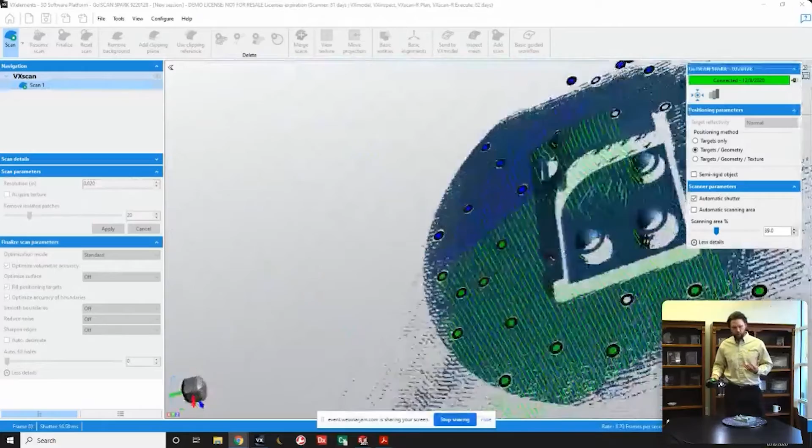This scanner will capture geometry as well as color. So if you have artwork and things like that you'd like to recreate in three-dimensional space with color, this is a great option. You set the scanner down. But again, this GoScan Spark is accurate to 50 microns, about 0.002 inch, one of the fastest 3D scanners on the market.

So I've captured the part as well as the table. Now I do want a little bit of the table left, so there we go. We're going to do an inverse selection. Again, this is VX Elements, Creaform's software. Extraneous pieces floating around won't actually be exported due to this remove isolated patch setting I've got. So it looks like we're good to go. That's a pretty decent amount of scan data there. So let's do a file export of the mesh.

All right, and that's the whole scan process. So if you had a second half of the part, you'd flip it over, click Add Scan, scan the other half, and merge them together. This one, we don't have to do that because the part's got a flat bottom. I'm just going to use the turntable. And from here on out, I'm going to be working in SolidWorks.

So this is where GeoMagic for SolidWorks comes in. To start a file, you would start just like a regular SolidWorks file, starting a new part. It's going to open up the part tools just like you'd normally use. Now, GeoMagic for SolidWorks is this tab on the very end, so it's an actual plugin within your main tool set. What's awesome about this software is that you can use the GeoMagic for SolidWorks tool set to extract features, then edit those features, and everything's going to be parametric. So anything it does is going to reproduce over here in your tree in a way that you can edit it.

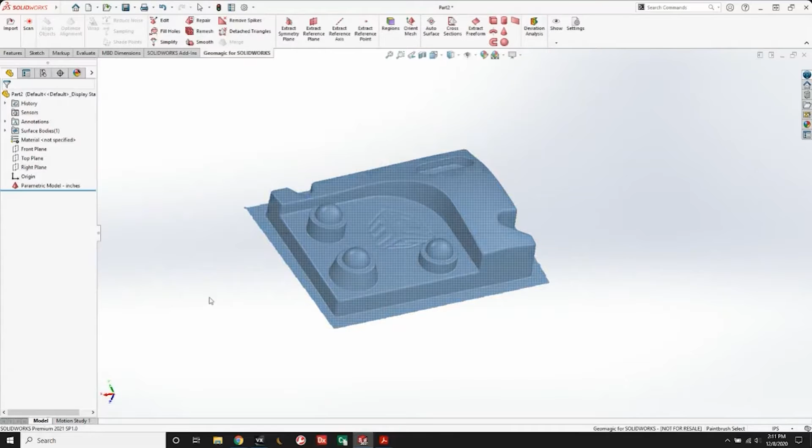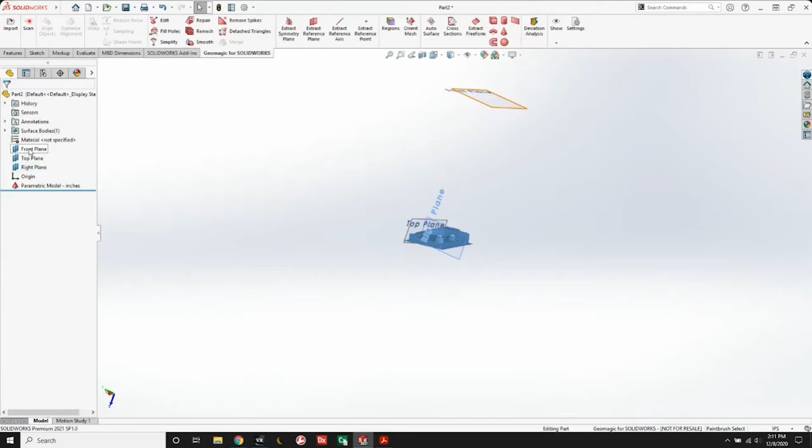So if we look at this part and look at our orientation planes, this is pretty common - the part's not oriented to our coordinate system. That's the first big step, the big problem this software solves. So I'm going to go ahead and use the software to align the scan to our coordinate system, get it a little more where it needs to be. Let's hide those planes. If you ever get a file from somebody that's been reverse engineered and it's not aligned to the coordinate system, this is generally the problem - they really don't have a way to do so. They just kind of import the scan and try to build features around it where it exists. That is not what we're going to do.

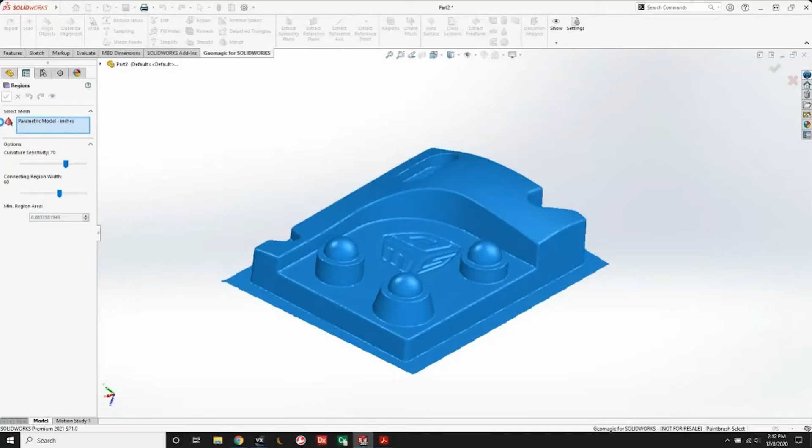We're going to go ahead and align this part. The first step is to divide the mesh up into regions. This is a feature from GeoMagic Design X. Regions are basically areas on the mesh that the software recognizes as individual features, so we can then pull those features from the mesh.

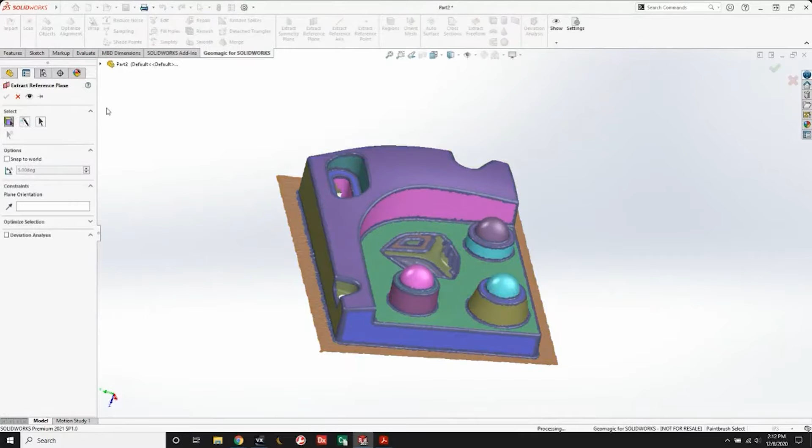The first thing I need is some reference geometry to get the scan to the coordinate system, and I can do that in GeoMagic for SolidWorks with these features. I've got extract feature plane, or reference plane. I'm going to click on that, click on my base feature, and I want the part aligned to that base, so I'll click the checkbox. I also want it aligned on this corner here.

I need a couple more planes. We're going to do extract reference plane again, click on that face. Then extract one more reference plane, and click on that face.

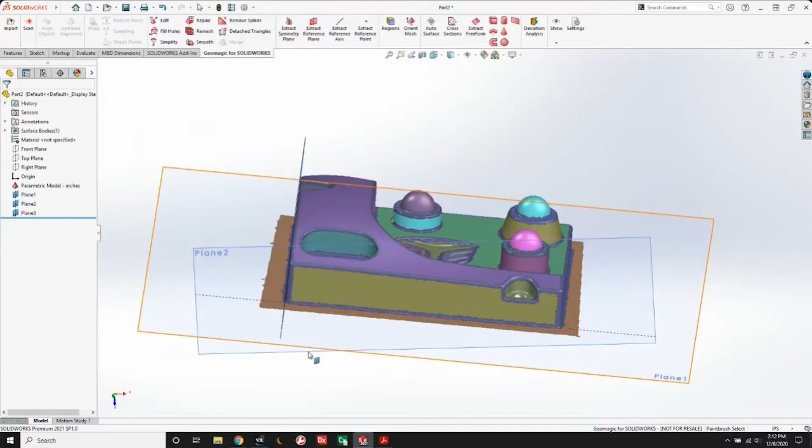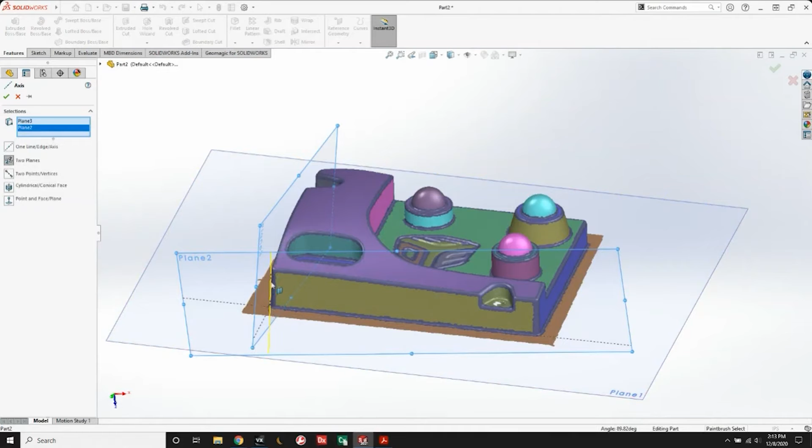Now to get my axis and point for a 3-2-1 alignment, I can go right into my SolidWorks features, so I can seamlessly jump back and forth because these are now features in my model tree. I'm going to go to reference geometry, axis, and choose intersect from two planes. We'll choose a plane here and a plane here, and that's going to give me my axis.

Then I'm going to choose a point because I want to choose where my origin is going to be, and it's going to be at the intersection of that axis and that plane. So there's my origin point.

Now I need one more axis going down the side of this part. I like to use the long edge. So I'm going to do one more axis, again intersect two planes, click plane 2 and plane 1, and there we are.

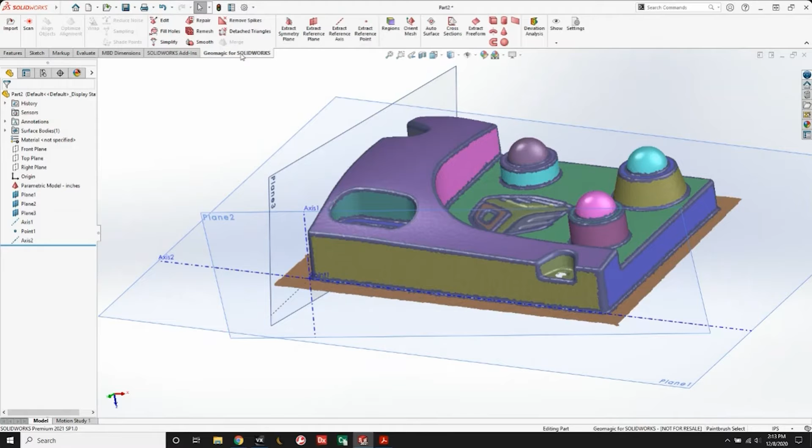I'm going to go back to the Geomagic for SOLIDWORKS tab, and we have the Orient Mesh button here. We're going to click on this, and it asks us a few questions. First, select the mesh. We only have one, so it's already there.

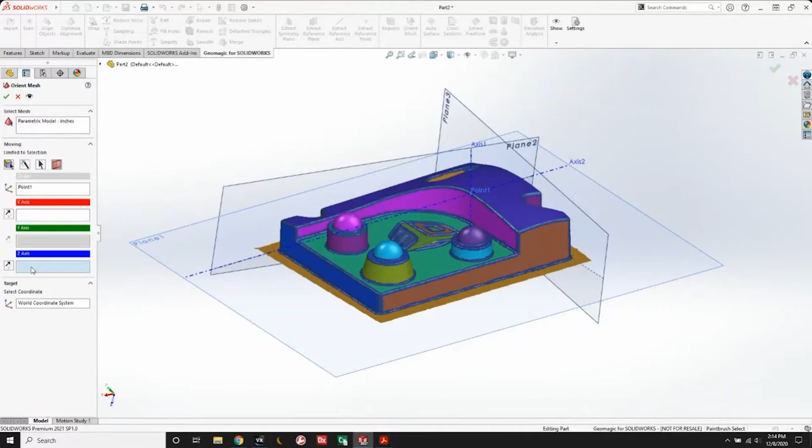Now we can pick where's the origin. I want the origin to be on point 1, okay? And now, with SolidWorks, the general isometric view is I kind of want it to look like this, where usually the Y goes up, the X runs in this direction, and the X runs in this direction. So what I can choose is Z-axis, then click on this vector.

That should snap the Z-axis that direction. Then for Y-axis, I'm going to click on plane 1, and that should get me how I want to go. My Y-axis is pointing down though, I don't want that, so I can just flip it, and there we go. Now I've got my coordinate system lined up how I want.

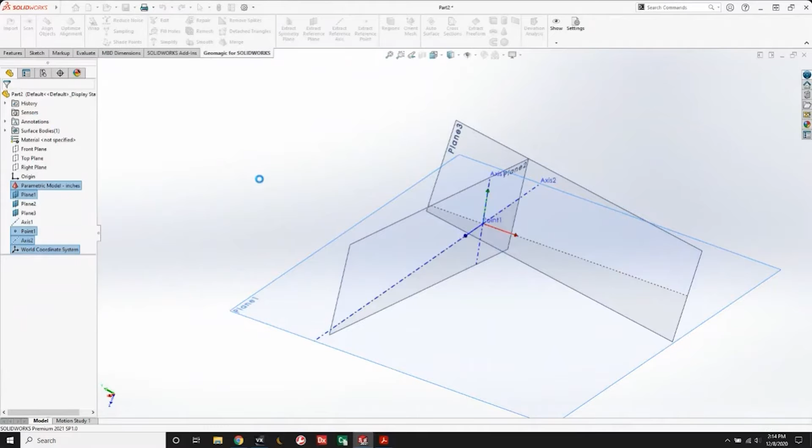So again, first big step is done. There we go. If I show my front, top, and right planes, you can see there I've correctly oriented my coordinate system, so that's what we want to see. The rest of these features are actually no good to us anymore, they're out in space, so we can select everything and delete it.

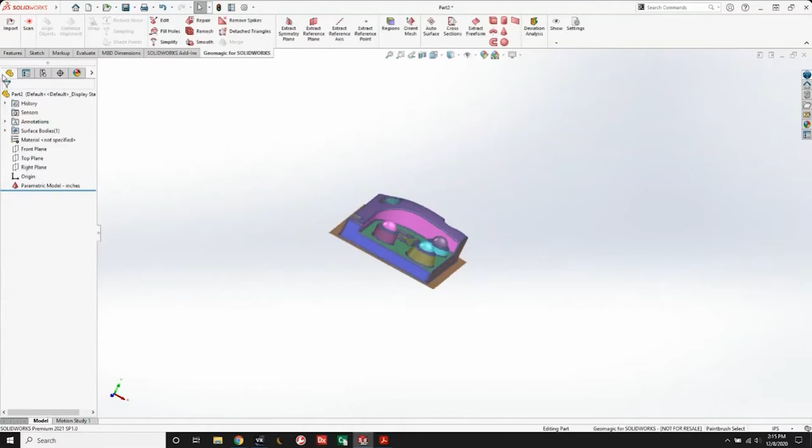So, all right, but we've got our coordinate system, we got our part aligned to our coordinate system. Now we want to start extracting our features, and this is where the tools get really cool. So if I want to make a solid part out of this, we've got a few extraction tools over here, and the first one is extract extrude.

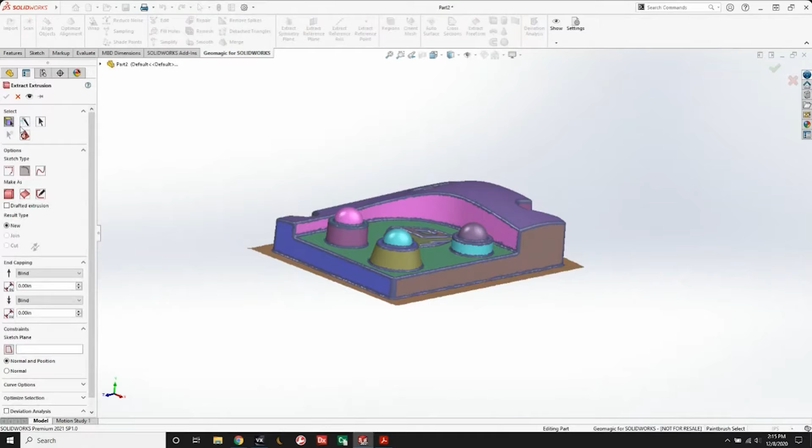If I click that, it's going to ask me a few different things. One, how do you want to extract it? I want to do it from the regions, and what I'll do is click the sides of my region, the side regions of my part. You can see it's already trying to create a preview.

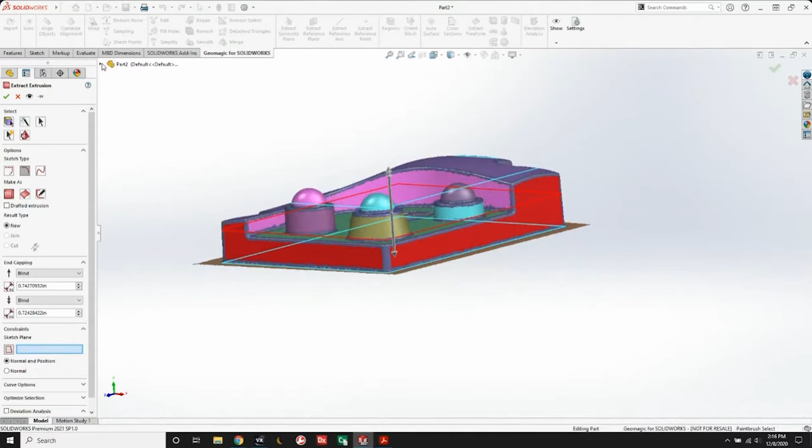So what it's going to do is analyze those regions, make a sketch, make a preview sketch, and then make a preview extrude. What I like to do is go ahead and constrain my sketch plane, so I'm going to make sure that my sketch plane is coming from that top plane. There we go, and let's see what else we got here.

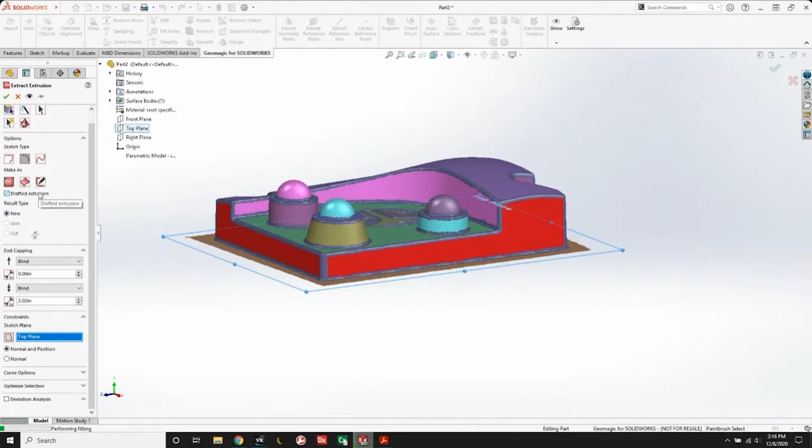I think that should be all the things I need. The other is the other end. I want to make sure it's dragged up above the part. We've got a few other options here that we can mess around with, but we're just going to leave it. I'm also going to check drafted extrusion because I want to make sure, whether it's drafted or not, this is going to find that out.

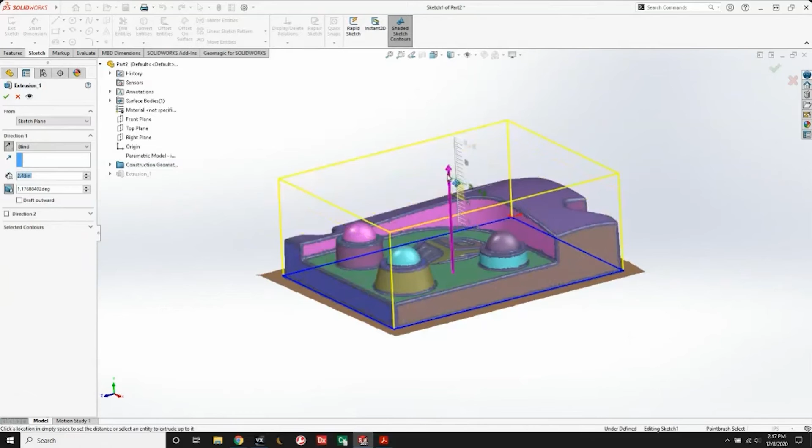So when I click my checkbox, it's going to create that sketch and create a solid body. Okay, so there's my extrude. Now what's awesome is you can see extrusion 1. If I drop this down, there's sketch 1. So it's created a sketch and an extrusion that I can fully edit in this software. If I need to go in and change how high I need to drag that extrusion, I can.

So it came up with an auto draft angle at 1.17. Maybe I want to just go ahead and make that 1, make it a 1 degree angle draft. There we go. And now we're ready to move on.

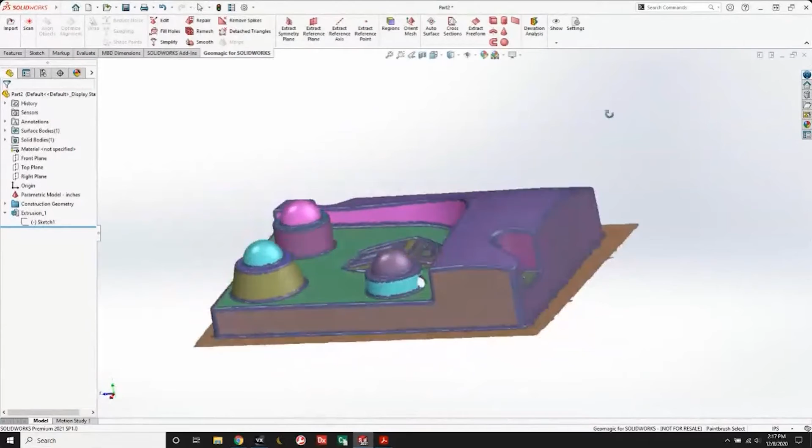So to cut the part down, I'm going to hide the solid body itself. And now I need to get the part cut back to this top surface. This surface here is an extremely hard surface to reverse engineer. There's no real good way to do it, there's nothing to measure from. It's just this weird, weird free form. So trying to make an accurate representation of that, there's no way to really do it if you were trying to do this on your own.

But this software lets us do it almost instantaneously. So we can say extract freeform. Same thing, it's going to ask us what regions to use. I'm going to click on that top region. All right, and we've got a few sliders here. I'm just going to leave them as default for now, and then we're going to click detailed preview.

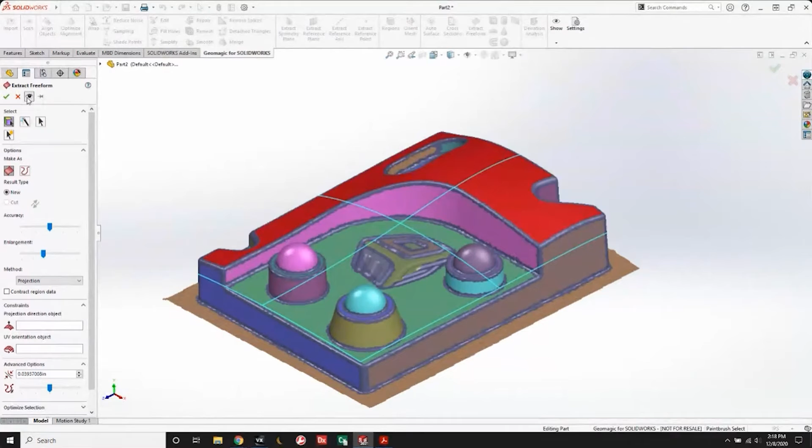So if I look at it, I can kind of see it's not totally fitting. And I also have at the very bottom this deviation analysis tool, and this is really nice. So I can choose how close I want to measure that previewed surface to my scan. I'm going to make it 5 thousandths. That seems like a pretty reasonable number. And you can see it's not perfect, there's some blue and some red, which means there's some high and low points.

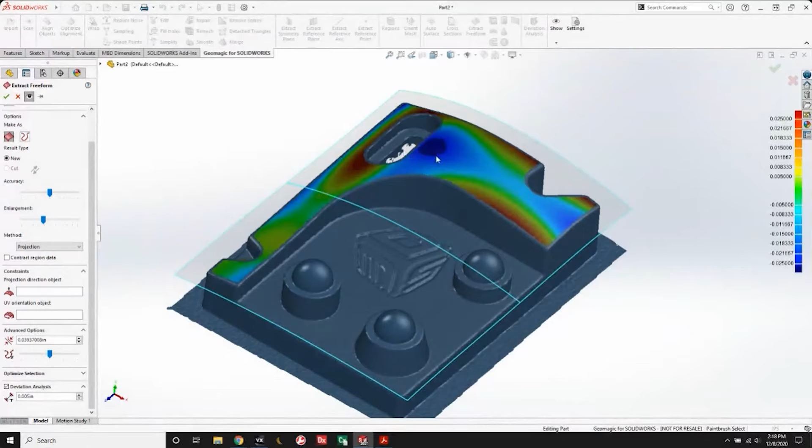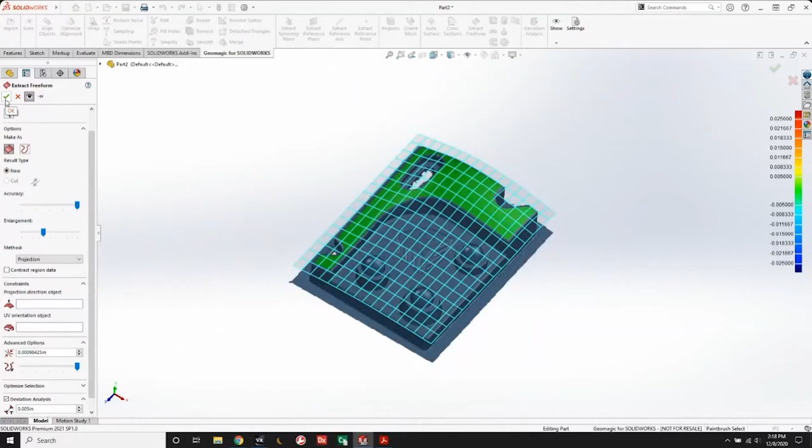So if I drag my accuracy slider bar, if it requires it to be higher, we'll let it regenerate that surface. And I can already tell that looks a lot better, and you can see it's totally green. So I'm within 5 thousandths of an inch all the way across that surface. The other slider is enlargement, I don't have to touch it. It basically just needs the surface to be outside of the boundaries of the part so we can cut the solid. So I'm going to click my checkbox, and that's going to make a really nice surface for us.

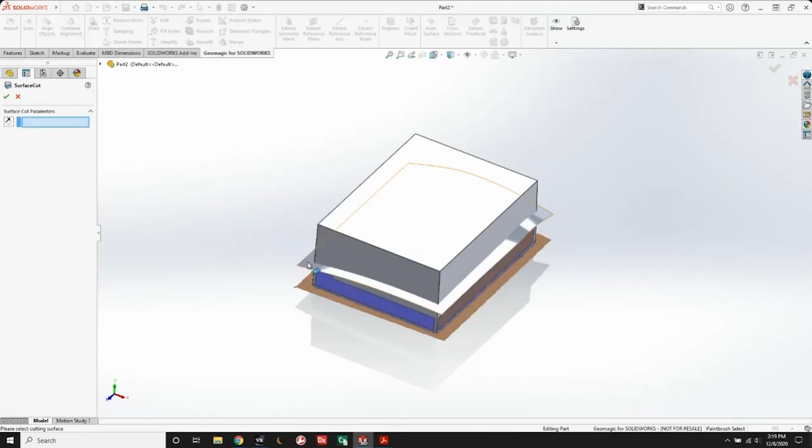So that surface is accurate to at least 5 thousandths of an inch, and we did it in just a couple clicks. That amount of time savings is huge. Now we can just use that surface. I'm going to show my solid body, and we're going to use the SolidWorks tool set. So insert, cut with surface, click that surface body, and make sure it's cut in the right direction. And we're done with that.

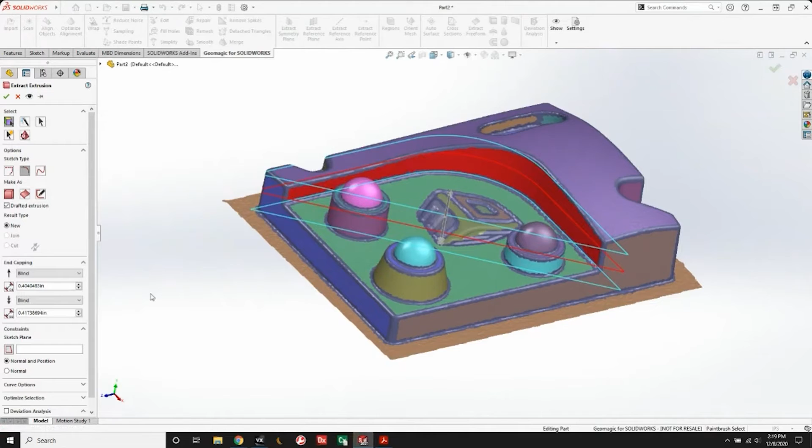So we're already working pretty fast here. Next thing I want to do is get that big pocket out, that'll be another extrude, an easy way to do it. So I'm going to hide this again, and then we're going to go back to another extrude. Here I'm going to click my region, and then I can kind of figure out what I want to do here.

So again, I want to do a drafted extrusion. And then I want my sketch plane to be, let's see here. You know what, let me throw a sketch plane in first, and then we'll do it. So let's do another extract reference plane. There we go. There's a plane, now we'll run it.

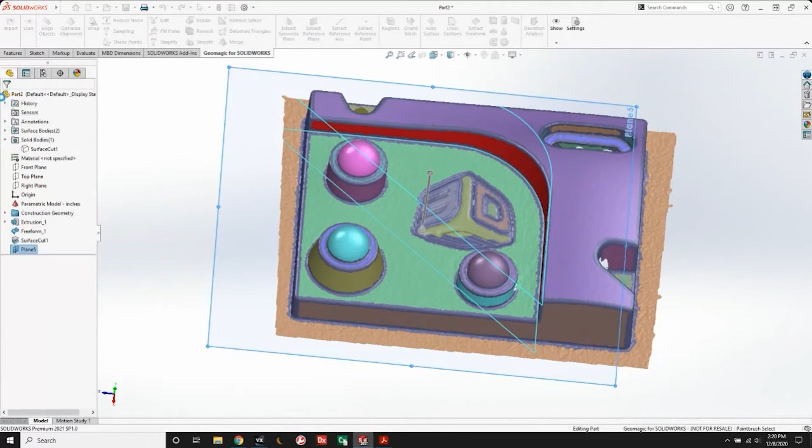So let's do extrude again, choose our region. I'm going to choose my sketch plane to be that plane we just extracted off that bottom face. It's trying to insert a feature, that's fine, we're just going to do a new feature. You see the preview sketch it's already made, so I can choose to just insert a sketch and edit that sketch and do an extrude cut, or I can just take what it's given me for now. So let's click the checkbox. All right, there's my extrude.

And I love SolidWorks' new tool sets. So some of their direct modeling tools, I can just click on that face, drag it this way until it's outside of the part, and then use the SolidWorks tool combine. So insert features, combine, okay, main body. Let me turn those solids back on.

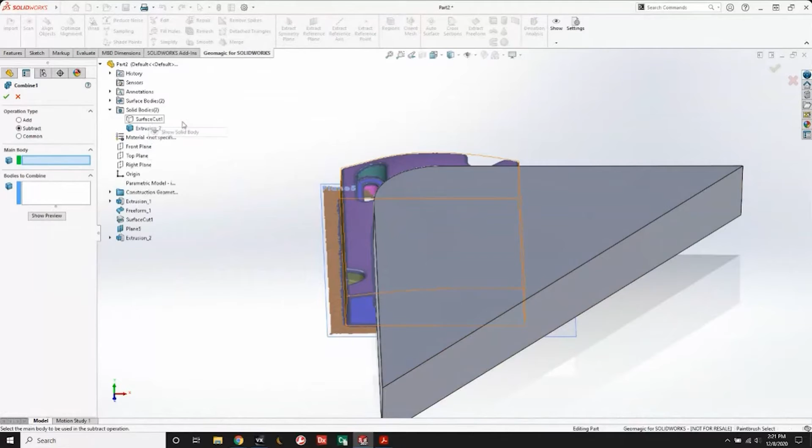So main body is going to be our part. Bodies to combine, click on that. There we go, it's cut out. All right, so we've got a pretty good match here. Everything looks really good. Now, in addition to the extrude tools, we've got all of these other functions.

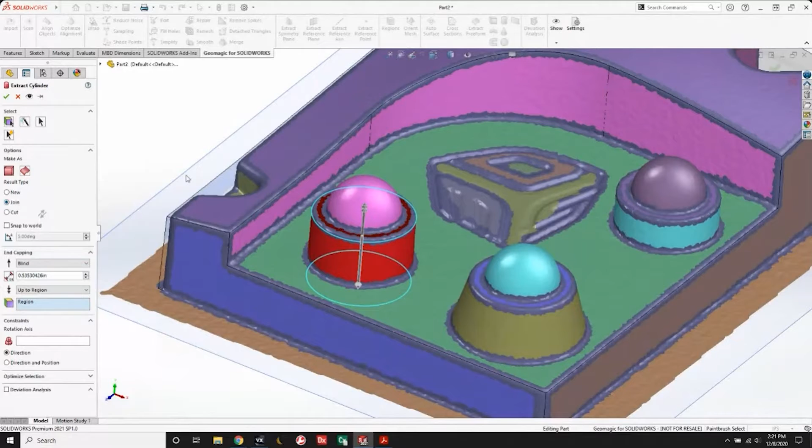If I want, this cylinder here, I can click on cylinder. I can just click right on the cylinder and then choose to go up to region this way, and then click on that top region. Then on the bottom, we'll drag it down into the part and make sure our resultant operator is join. What it does is create a sketch, creates a region surface, and just inserts a cylinder for us, super quick. Everything's merged up.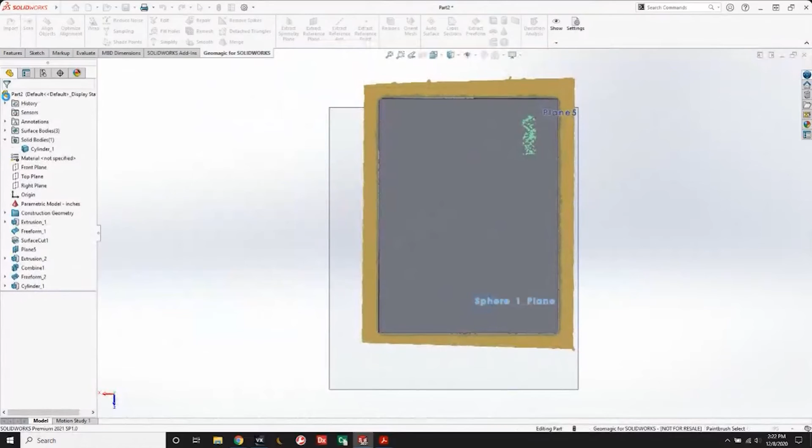If I want to do the same thing with a sphere, I can do that. I can click the sphere, click on that top sphere, click the checkbox, and it's going to merge it in there as well.

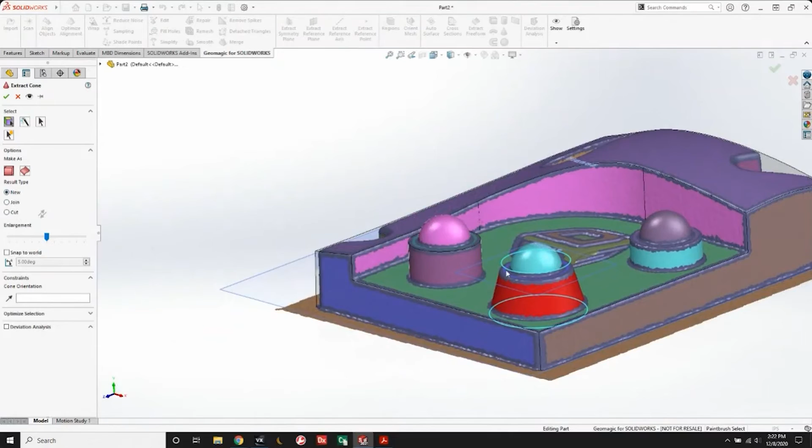We can do a cone. So let's do one more sphere, one more cone. With the cone, I want to put another surface up top here on this guy. We'll do insert cone, works just like the cylinder, only it's going to have some extended ends, which is fine. I'm going to say new insert so it doesn't merge into my part. There's my cone, and then I'm going to do an insert cut with surface and cut the top of that cone off. So let's get that plane, make sure the correct body is set, and then cut away up.

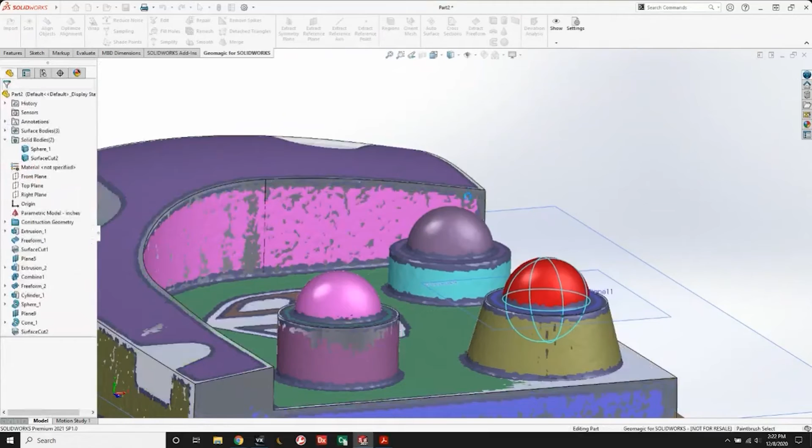One more sphere. Make sure it's in join so it merges the entire thing together. So we've got an auto extrude, auto cylinder, sphere, and cone extractions inside this part.

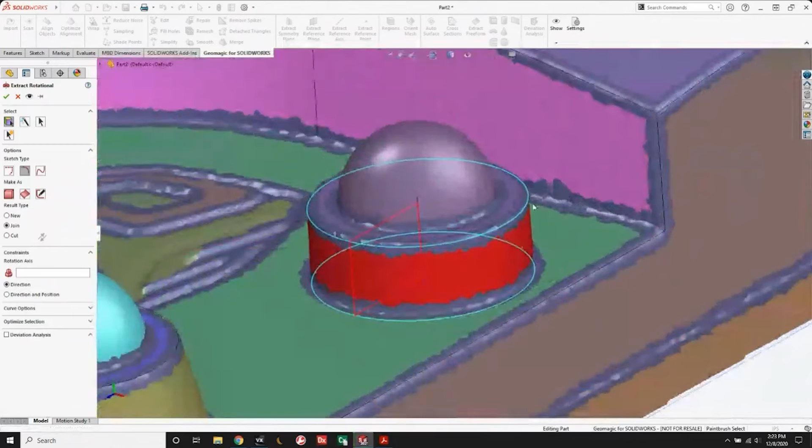Last thing I want to show you in this little group is the auto revolve. So if you want to just do the entire thing at once, cylinder and sphere, we click auto revolve, click the regions that we want to revolve, and you can see it's already building a sketch. Let me hold shift to make sure I've got everything selected, but it's created a center vector and a sketch. All I have to do is click my checkbox, and it does that entire feature set at once. So for individual components, you can do those components. And there we go, we got most everything done.

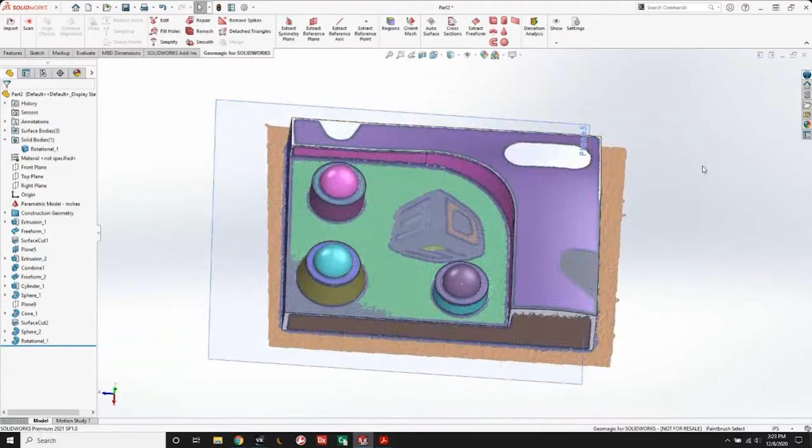There's a few other things we can do here. We've got some pockets, I'll do these two. So another big function in this, and we'll get to the auto surface here in another example. But one last thing we can do is if I want to cut these pockets out, I can start by making a cross section.

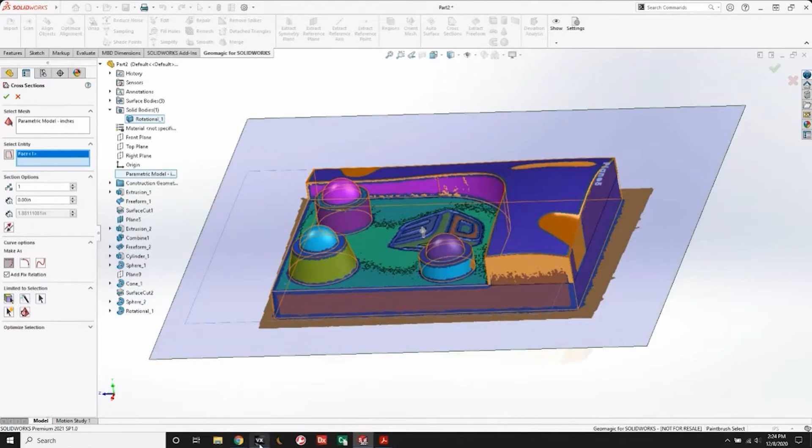It's going to ask me which plane I want to start on. I'm going to start on this plane here, and it helps if I hide everything, so we're going to hide the solid body. Okay, let the graphics here catch up for a minute. While we're doing that, I'm actually going to close down VX Elements just so we're not taking up any memory here.

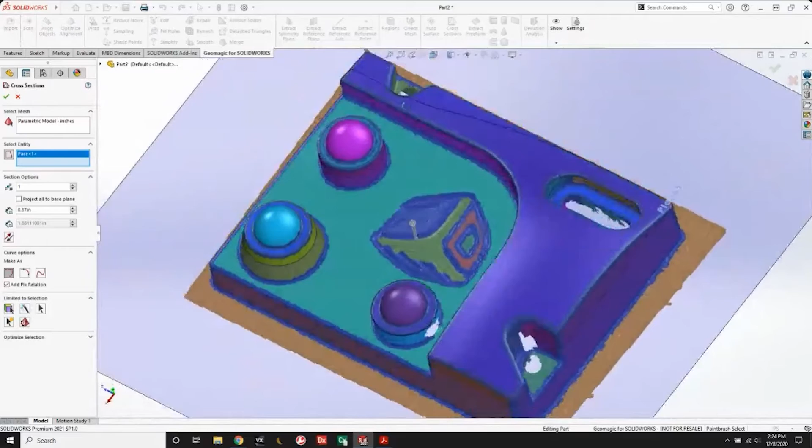So what the cross section does is it allows us to drag a cross section plane through the mesh, and you can see there it gives us a cross section of the part. So it went up a little too high, I'm trying to get these two pockets. All right, so we're going to go down a little bit more. I want to cut through there, that's perfect. All right, and click my checkbox.

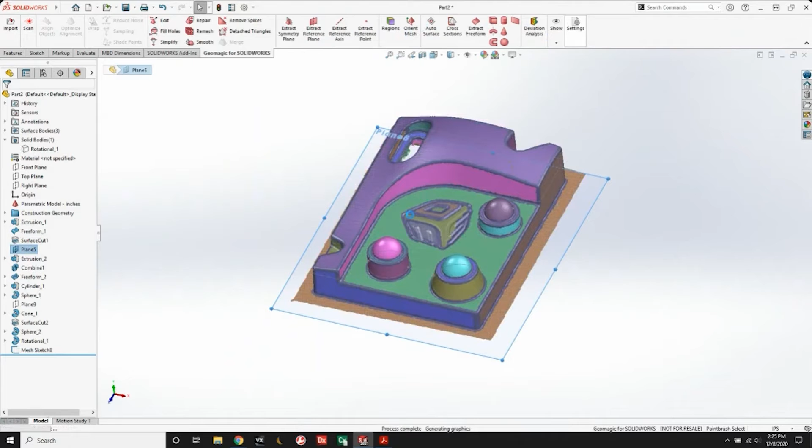So it's created a cross section, which is basically just like a spline. Now I want to use that spline to sketch on top of that spline. I want to sketch on this face because I think those are on the same plane as this piece. So what we're going to do is go right to our SolidWorks sketch tools, click on sketch.

There we go. Okay, and now let's hide our mesh. I'm going to use SolidWorks sketch features to sketch right on top. There we go, there's one. Let's do a vertical line. Oops, that's not the one I want. There we go, all right, I'm just going to drag another line out here.

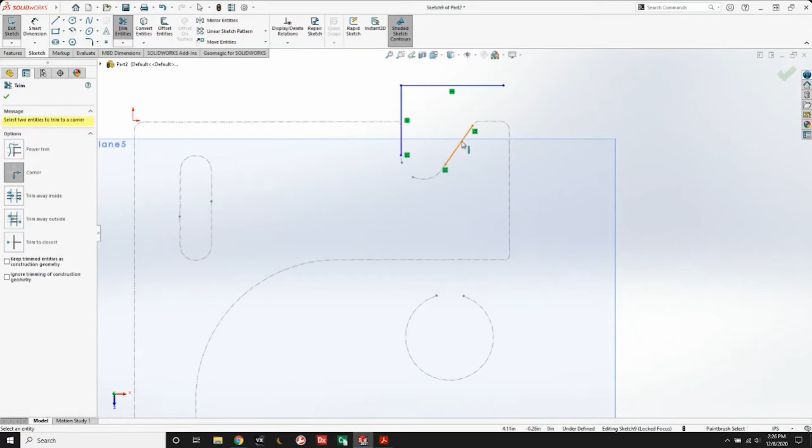There we go, let's trim these up together. So we got a corner trim, and again, these are all just standard SolidWorks tool sets. We'll do that, and we'll go ahead and put a fillet between these two. All right, and obviously that fillet's too small, so let's start increasing that number.

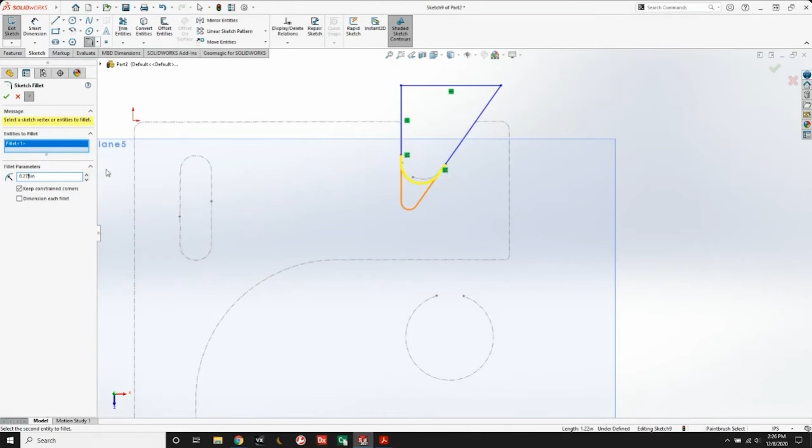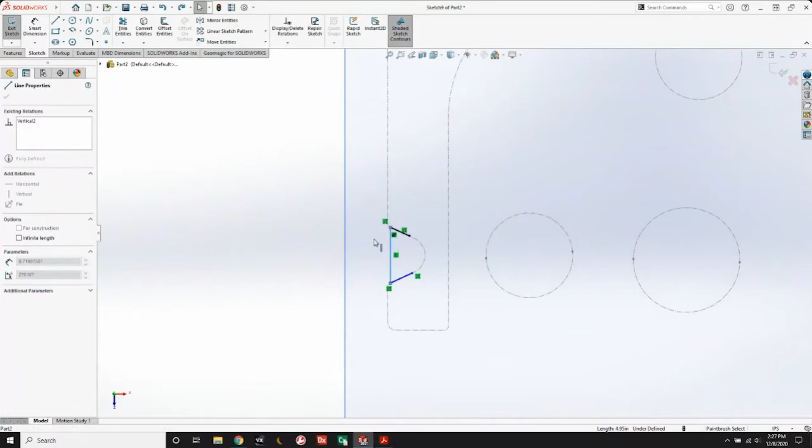All right, awesome. Now we're going to do the same thing down here. Again, all of your SolidWorks tools are ready to go at this point, so we're going to click that. Start, here we go. Okay, I'm going to drag this outside of the body. Oops. Tell you what, let's just get rid of that guy.

There we go, all right, let's draw a straight line out here. Same thing, we're going to use our corner trim to get this connected up here, and then we're going to use that fillet tool. Wonder if this is the same radius, we'll see. There we go, not quite, so this is probably 0.25.

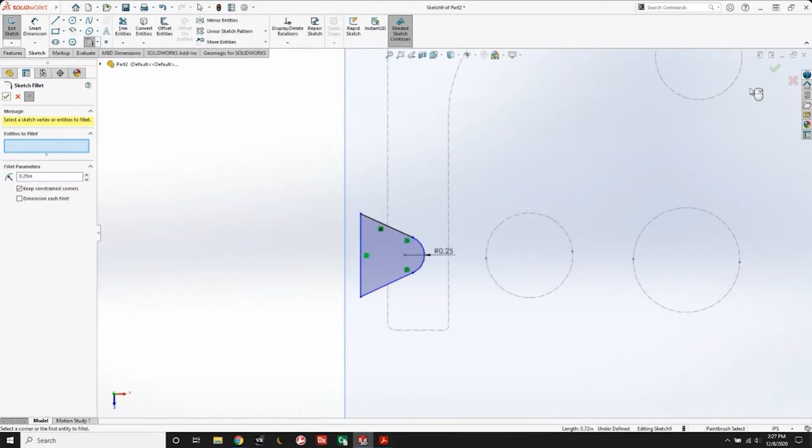Yep, there we go. All right, so now we trace on top of a cross section, so you can use this for cutting through multiple profiles. You can use this for auto lofting, or not auto lofting, but helping with your lofts and things like that. All right, so we'll go to our extrude cut at this point, and pull that up and out of the part.

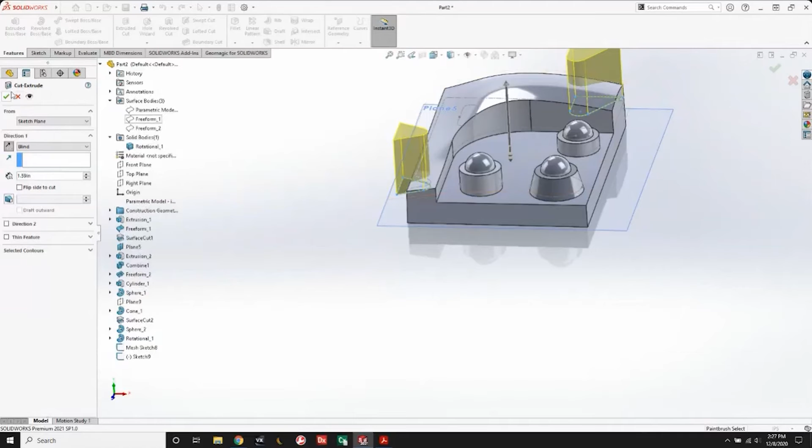And there we go. So let's click the check box and we are pretty much done. The only other thing there is, there's that other pocket, and it would just be another extrude. I do want to show you guys some more feature sets.

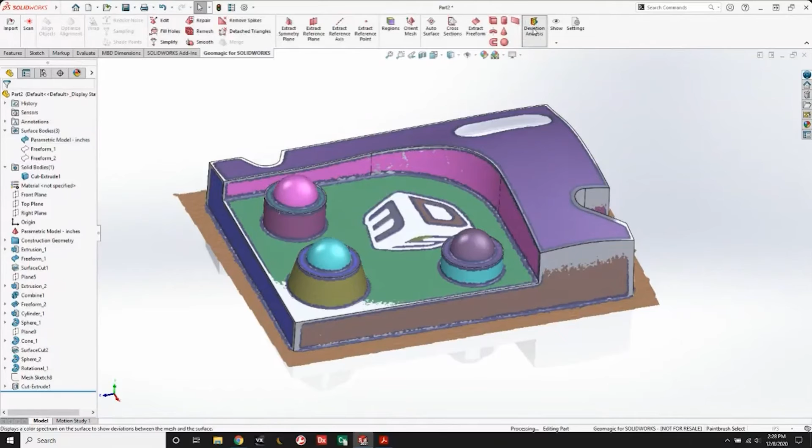But at the end of the day, once you get here, what's nice is we can go to Geomagic for SolidWorks, and then if I show my mesh, I can then check my deviation analysis to see how close I've got. So it's going to ask us for a mesh versus a solid body.

And so this is kind of the final step and the advantage of this software. If you do this stuff by hand or you kind of eyeball it, it's really hard to see. There's not really a good way to tell how accurate your final file is to the mesh that you've scanned. If you've got a Creaform scanner and your stuff's accurate to a thousandth or two, you've got to have the tool set to take advantage of that.

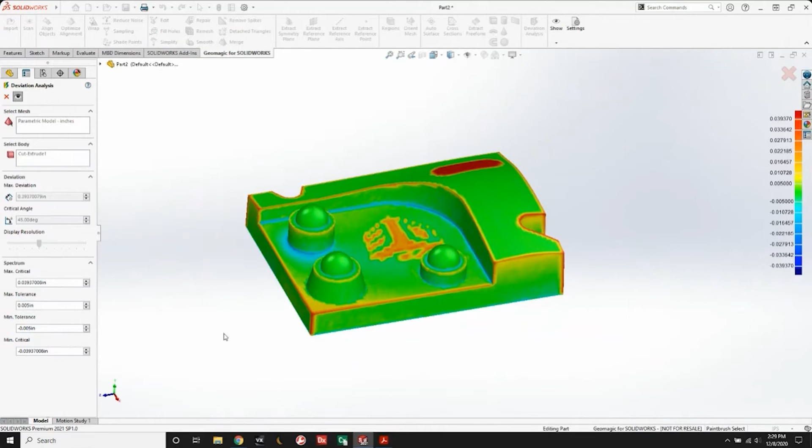Otherwise, you're kind of shooting yourself in the foot there. So with this software, we can tell just how close we are on all of our surfaces. That looks great, this is all plus or minus 10 thou. So you could adjust these, we could run a plus or minus 5 and reevaluate that. So we'll click it one more time.

There we go, and see just how our surface is looking. And this is an injection molded part, so at 5 thousandths we may see a little bit of deviation, but overall our part looks great. So we're pretty much done, and this is easy to see if you've got something missing. So if you model the part and you don't realize that there's a boss or a hole or something like that you need done, this very quickly outlines it so you can see right there.

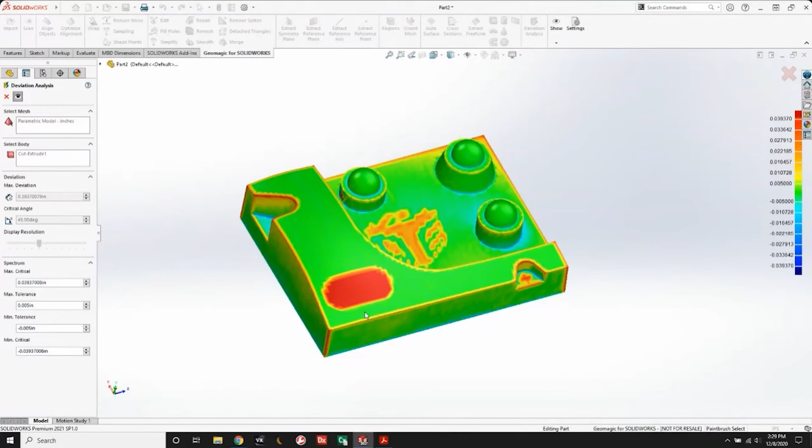So that's the parametric functions, just a quick overview of the parametric functions of the software, all found up here and very powerful. I'm going to minimize that.

All right, so if I want to do some mesh editing. As you can see here, not only do we have the parametric functions, we've got some reference extraction, reference geometry stuff, we also have this mesh editing function. So if you're using a scanner that you need to do some heavy mesh editing or merging, stuff like that, this software can handle it.

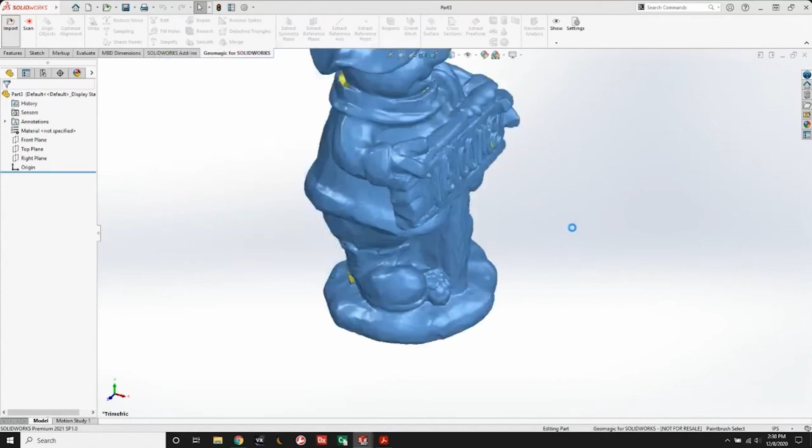So we're going to start with a new file. Okay, here we go, and again, we import into Geomagic for SOLIDWORKS, and I'm going to choose this file right here. So just to be in the spirit of the times, we got a snowman here. All right, so maybe you 3D scanned this guy, maybe you sculpted it, or you just want to reproduce it for fun, who cares, whatever it is you need to do.

And you want to make maybe a 3D printed part, so you hear 'scan to print' a lot. Well, it's not a one-click button necessarily, but having something like the Creaform scanners, you can see, I mean, this is straight out of the scan, and this is awesome. And I was a very lazy scanner on this one.

I've got a lot of data missing. This isn't what we would typically see or end up with, but I did want to have an example file. So if I want to make a smaller version of this guy and make some edits, I can do all that here in Geomagic for SOLIDWORKS.

The first thing I want to do when I import a scan, especially if I'm going to surface wrap it or use it for 3D printing, is check the repair tool. This is just a quick check that goes through and diagnoses the mesh, making sure there's nothing wrong. You can see there's always something, but we want to zero these out. Here's all the defects it can find. All we have to do is one checkbox click and it's going to fix those.

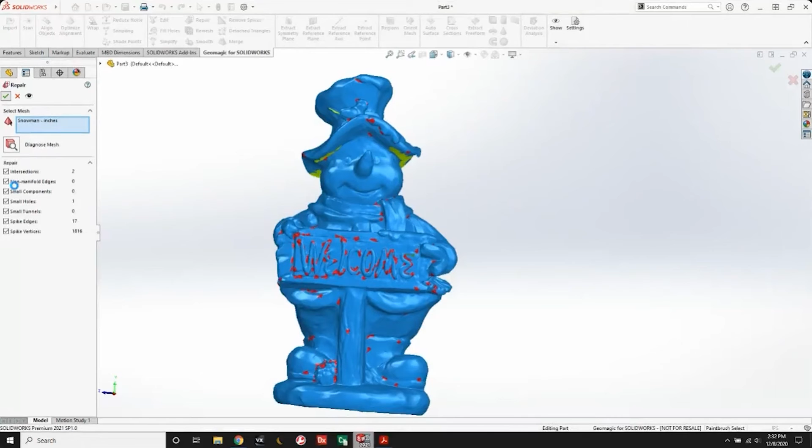You can see small tunnels, spikes, small holes, things like that—stuff it can get rid of very quickly. That's going to run, take just a minute. Now our mesh is pretty cleaned up. There's also, right under repair, a remesh option. If you've got a pretty nasty mesh, you can use that, and it'll go through and re-triangulate it. We don't have to do that here because our mesh looks really good. So we've got a few options.

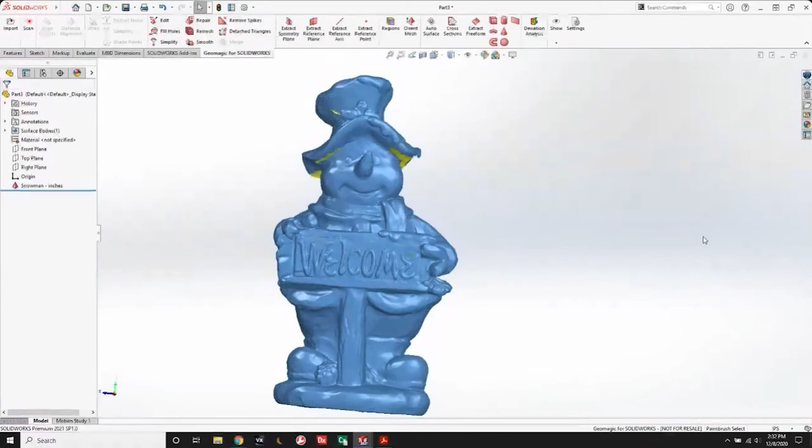Let's say you want to 3D print this guy smaller, but you don't want it to say 'Welcome'—maybe you're going to glue on your own letters from your favorite arts and crafts store that say Merry Christmas. So what we can do is get rid of the 'Welcome' here.

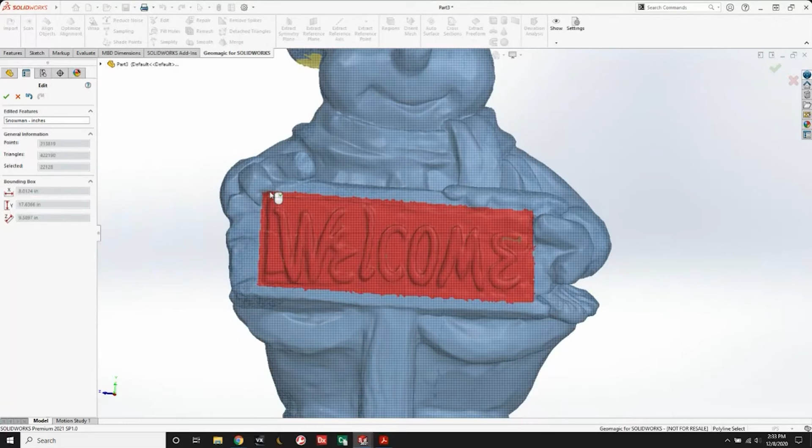How I would do that is edit the mesh, and I'm going to choose my polygon selection tool. Let's get normal to the screen here. So what I can do is just select around the current welcome sign, right click, and say delete. That's going to leave me with a big hole.

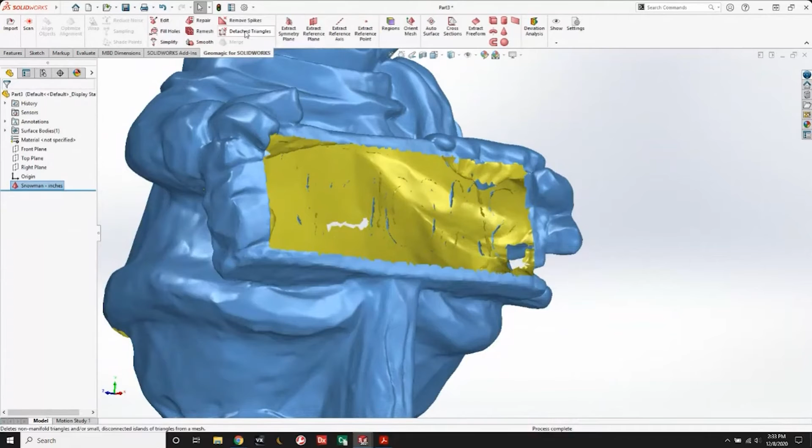Now, depending on the triangles and how they're facing the screen, you may get all this trash here. This is pretty common in a raw scan data set—something converted from a point cloud or whatnot, you get a lot of nasty artifacts floating around with the scan. So there's one click button to get rid of this: go up to detached triangles, make sure the mesh is clicked, and click the checkbox. That's going to get rid of every little piece in the mesh besides the main one. Now we're ready to do some serious mesh repair.

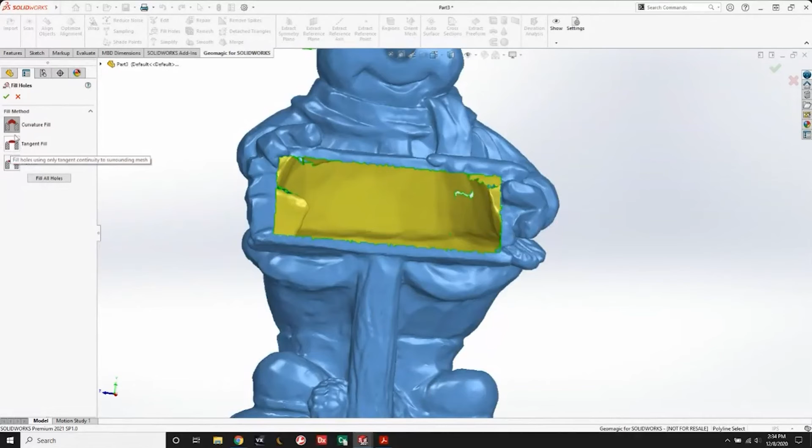If I want to get rid of that hole and make a solid sign, we've got our fill holes tool here, with flat, tangent, and curvature options. It basically goes from flat, to following the feature curves to the edge, to curvature, doing some heavy curvature fill. We're going to use tangent—it's usually what I use because it does a really good job. I right click on that, and boom, there we go—the hole in the sign is filled.

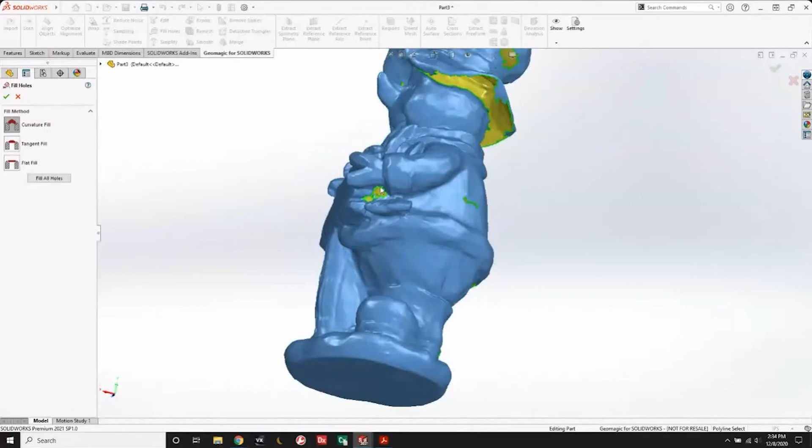As we move on, I can look at the part and see there's a lot of stuff missing here, right? So I can click on curvature fill because there's a lot more curvature in here, and start individually clicking on features. These are some pretty easy ones—if I select the hat, there's not a lot of geometry there, but it literally fills it so you can't see that hole.

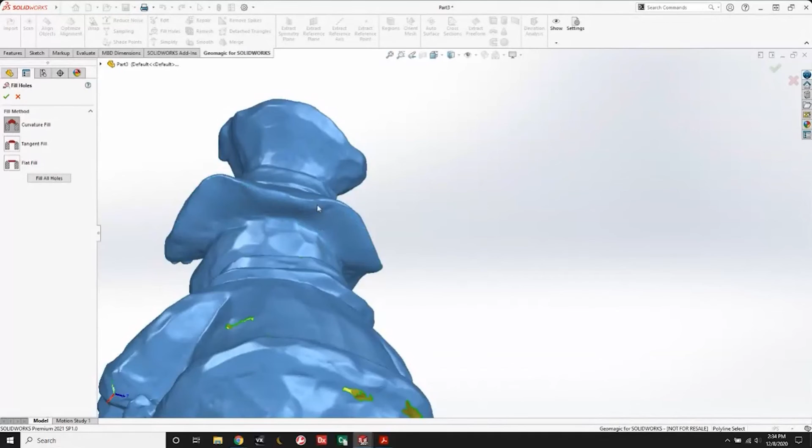A pretty challenging one, and I was pretty happy with how it did on this: the underside of the hat has a huge void in the scan, but if I click on it and tell it to fill that hole, you'd never know it wasn't scanned—the software does that good of a job at hole filling. So I can go through and click all the individual ones, or just say fill all holes, and it will fill all remaining holes with curvature. We click that checkbox, and that gives us a completely watertight mesh.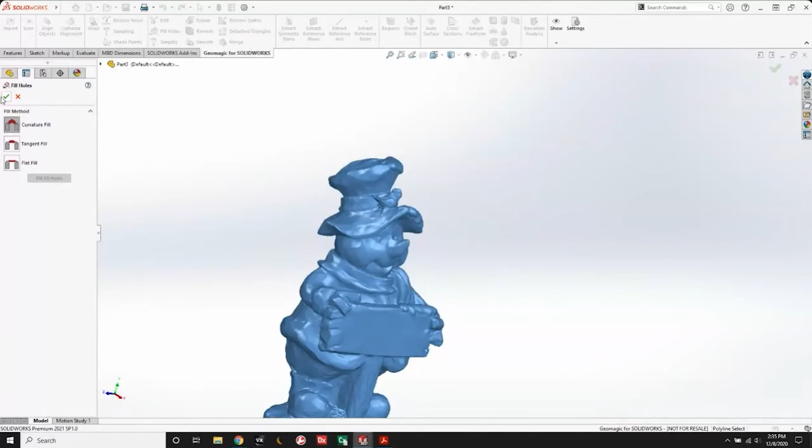So that's the process of scan to print. Now I can put this guy right on any 3D printer. I can save it as an STL and print him just like he is.

So that's an extremely fast way to get from a scan to a 3D printable file. Or we can do what we're going to talk about next: rapid surfacing. If you physically needed to use this for something in SolidWorks, build something around it, we could use the auto surface function. I'm not going to do it on this guy because he's very complex and it'll take more time than most of you are willing to sit around and watch the screen crank.

So we're going to move to another example, but I do want to wrap up the mesh editing function. Again, that's all under this tool set, nine tools that are very, very powerful. If you've got questions, type them in on the chat and I'll definitely get to them. So let's minimize this guy.

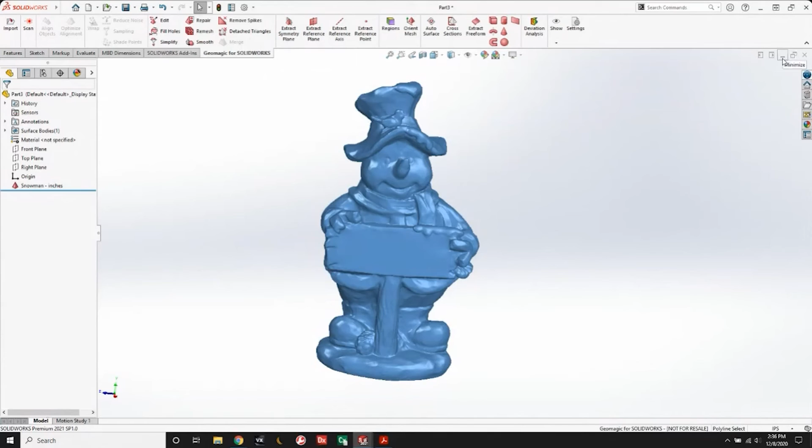We're going to move to our final, kind of heavy-hitter tool set in this software. Again, we're going to make a new part. So we're in our fourth part in SolidWorks. Again, import one last time.

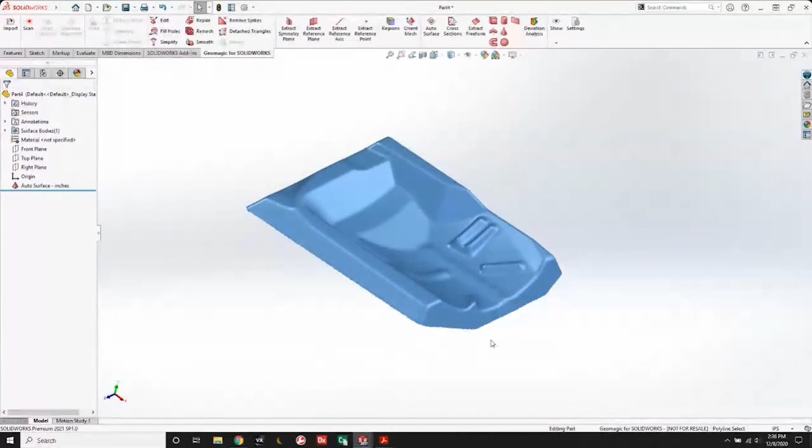So I scanned a kind of auto surface part earlier. Makes for a good example, I think. Not nearly as complex as a snowman, but it'll definitely show you the advantage of this. So let's say you've got a part like this. You could use the geometric features to reverse engineer it, but you wouldn't necessarily want to. It's kind of tough. There's not really a faster way than any of the Geomagic products.

But let's say you want to make some sort of fixture that's going to perfectly mesh up with a portion of this part to hold it in place for some sort of machining operation. But you don't have the CAD file of the part. Well, we can do that here.

So I'm going to click on Auto Surface. There's a couple of settings in the Auto Surface. One, select the mesh—so there's the mesh right there. We've got geometry type, we can either choose mechanical or organic, and I'll explain the differences between those two. On this part, I would want mechanical.

And then on patch count, you'll see what this does—it basically makes a bunch of patches on the part. I want to let it auto estimate, I don't want to limit it to something. You also have a surface detail slider, there we go, we can kind of crank it up a little bit more. Pretty similar to the extract freeform—you're giving it some leeway to leave out some detail or really perfectly match up detail. It may take a little more time to do the higher surface detail. This one, there's not really any detail, so we can leave it right there in the middle.

Adaptive tolerance, I just kind of leave it—it auto estimates this value here. So when I click my checkbox, other than your settings, you've got one click, and it's going to evaluate that mesh and should spit out an auto surface here in just a minute.

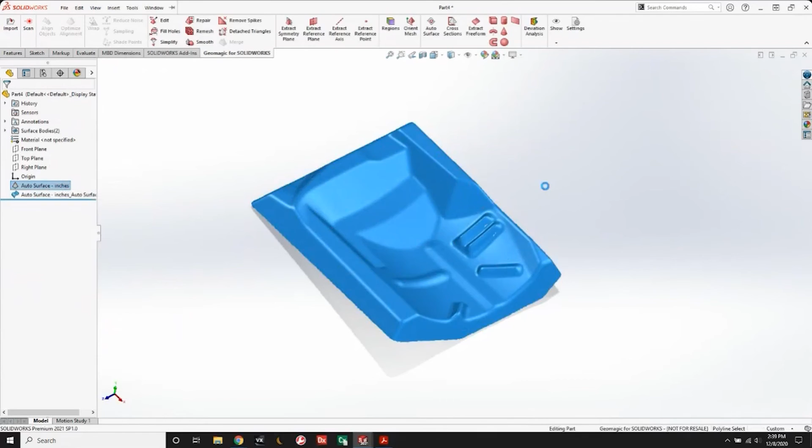All right, here we go, it's finishing up. And now you can see we have a part in here. So if I hide my mesh and show my surface—there we go, so we now have a surface. If I show my edges here, this is an actual CAD feature now. Now it's not parametric, it's not feature-based—it's basically a shrink wrap surface over the mesh. But what this does is it allows SolidWorks to use the file a lot better.

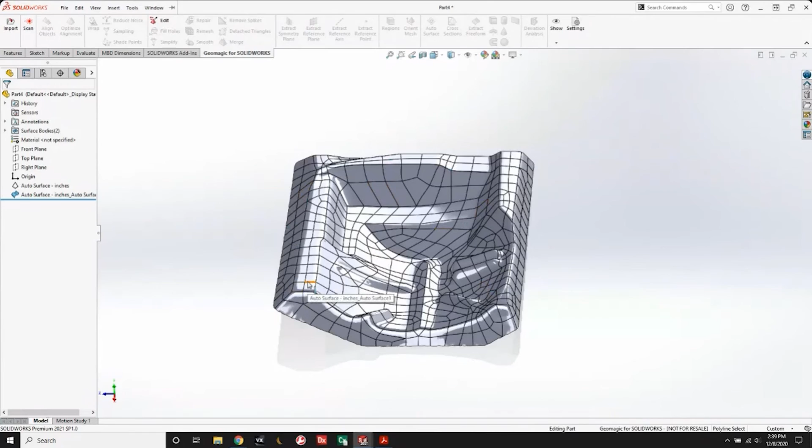So if you've got a part like this that you're trying to send to a customer or a boss or someone else in your department, and they don't have the ability to use an STL like you do, if you've got this you can do a surface wrap and send it, and SolidWorks has no problem with these. It's basically what we call a NURB surface, a very common file type. But you can see here with the mechanical feature selected, all the feature lines flow with the features.

So if I hide this and run that one more time, we're going to do our auto surface again. I'm going to click organic this time and then click my checkbox. I expect it'll take just a little bit less time because we're not constraining it to feature lines.

We're letting the software figure it out, but again, we're just running it. And what you'll see at the end of the day is really an equivalent file. It just depends on how you want those feature lines to flow. It should be done here in just a minute. Again, if you have any questions about the parametric workflow or the mesh editing workflow, feel free to let me know.

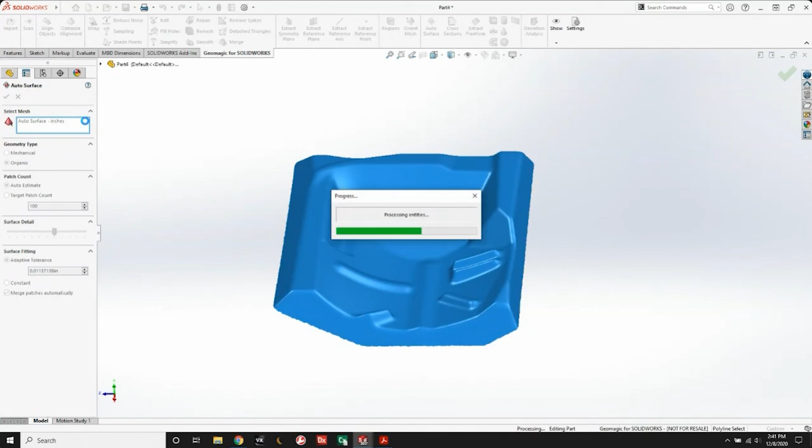Again, for those of you who aren't familiar with what we're doing, or this is pretty new to you, we're taking an STL from a scan that traditionally can't really be analyzed by a CAD file, and we're wrapping a surface over it that SolidWorks or some of the software can actually interpret very easily.

All right, so if I hide my scan again, you can see we essentially get the same file. If I turn my edges on, it still kind of follows the lines, but the patch is a lot more sporadic. If you're wrapping something like that snowman in the previous example, you would use the organic setting because there's no real feature lines you want to wrap. You just want to let the software do as good of a job as possible.

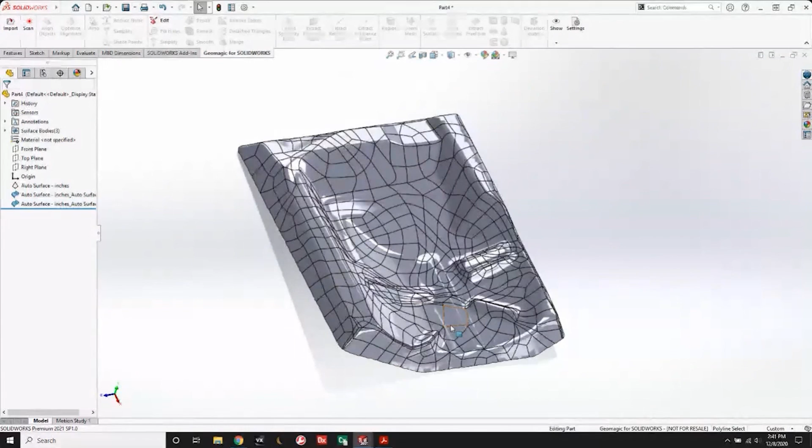But if you see here, if I turn the edges off and use one of the SolidWorks tools, let's do features and then move. I'll just click one of these and drag it over, doesn't really matter which one. There we go, okay.

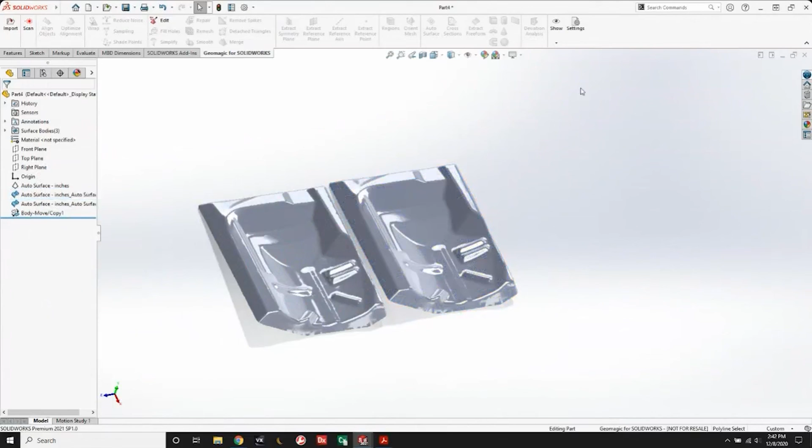And show the old one. So they're pretty similar, you can't really tell the difference between them other than when you turn the edges on. All right, but what would I do with this?

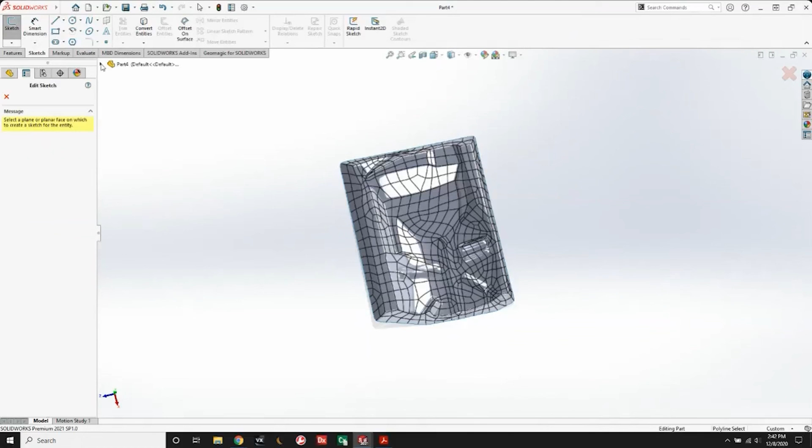So now I have a feature, or say a part that I can use for cutting a model. Let's hide this one here. All right, let's just say that I've got this weird surface that I need to make a tool that will perfectly match. So go right to my sketch, use the SolidWorks sketch entity. Let's sketch on the top plane here, and I'm just going to draw a box.

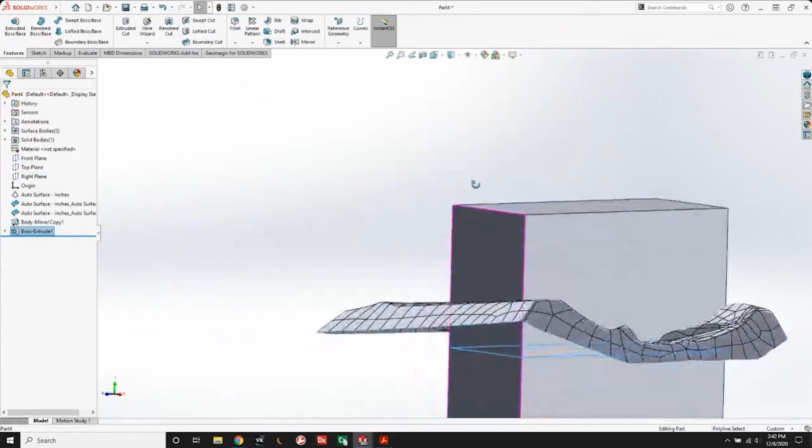Let's say we have to match up this location of the part. All right, we've got some sort of abutment that it's going to go right there. We're going to make that sketch, do an extrude. I'll go ahead and run this as a mid-plane extrude, pull it out. There we go. Maybe that's our tool. Okay, so again, SolidWorks functions all the way.

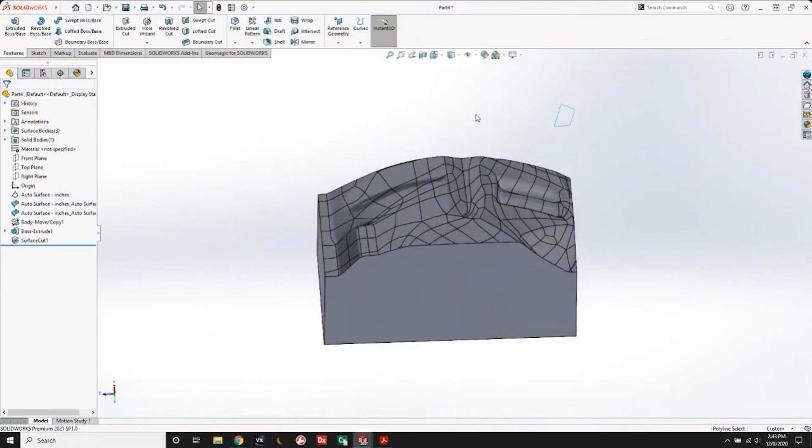We go to cut with surface, select that surface, and just make sure it's cutting the right direction. So I want to cut, maybe we want this side of the tool, so going the right way. There we go. And now we've perfectly duplicated that geometry of that part onto what would be otherwise a parametric fixture.

So that's one of the reasons why you would use that auto surface. We use it all the time here. It's a great tool, and Geomagic was awesome for including it in their Geomagic for SolidWorks suite. So that's the end of those, those are my three examples. That's kind of the end of the presentation here.